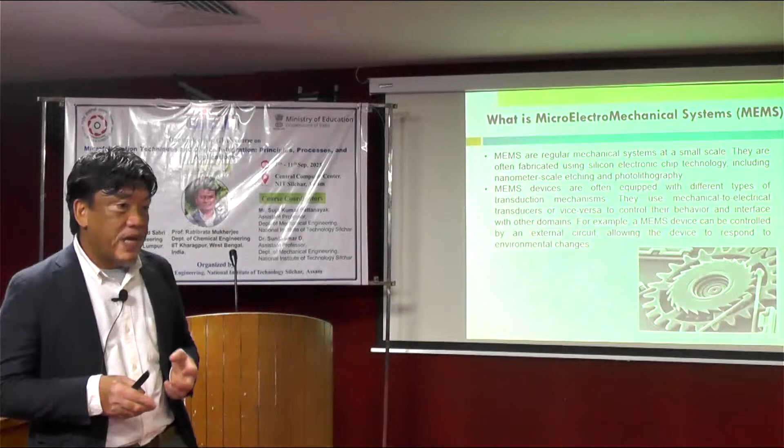MEMS devices are often equipped with different types of transduction mechanisms. It's the same as normal devices - you need to make them move, right? So you need a motor, for example, to make certain machine functions happen. You cannot have a normal motor or actuation mechanism like pneumatic actuation for this kind of device - it's almost impossible. So you need to move them a different way using different kinds of actuators. For example, you have piezoelectric, so you can have piezoelectric be the motor or actuator to move certain parts of the machine. You have electrostatic, so using electrostatic force you can also make things rotate or move. And you can have electromagnetics, etc., in order to actuate or move some nanoscale or microscale components inside the MEMS devices.

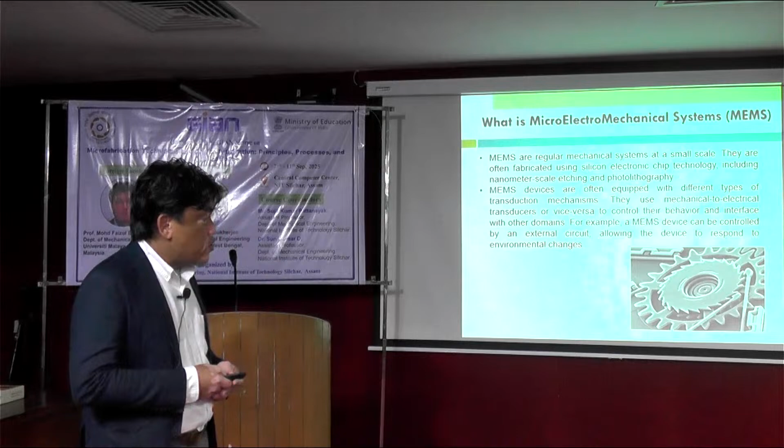As mentioned, a MEMS device can be controlled by an external circuit, allowing the device to respond to environmental changes. So you can have some kind of actuator embedded into the MEMS devices. Later on, when it responds to heat or light, for example, it can make movement. So that kind of sensitivity towards the environment, and anything that can make the machine respond, can then be used as a tool to make whatever intended work needs to be done.

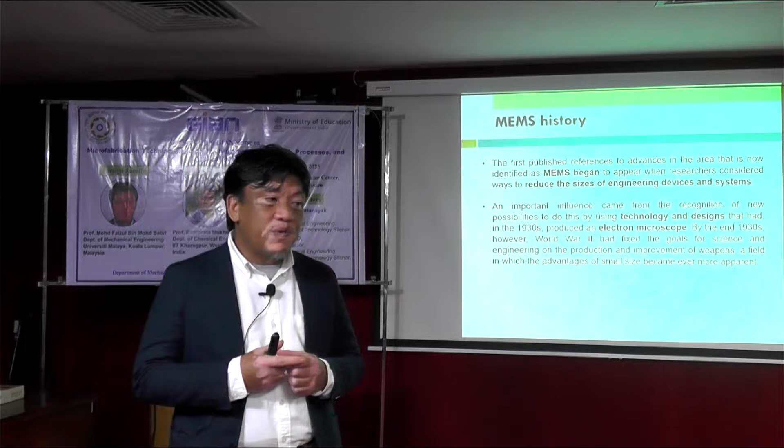Okay, a little bit of history of MEMS. The first published references to advances in the area now identified as MEMS began to appear when researchers considered ways to reduce the size of engineering devices and systems. So it's not from the requirement of having small things - MEMS also evolved with this concept and principle. Originally we wanted a small device so that it becomes more efficient, for example, rather than a big device, done through precision engineering. From precision engineering, it evolved more towards smaller scale and smaller devices to lower energy consumption, for example, or to increase the performance of the device.

So you make it smaller and smaller, and with that you get more towards sustainable engineering - that is part of the philosophy or initial intention of MEMS. An important influence came from the recognition of new possibilities using technology and design that, in the 1930s - quite a long time ago - produced the electron microscope.

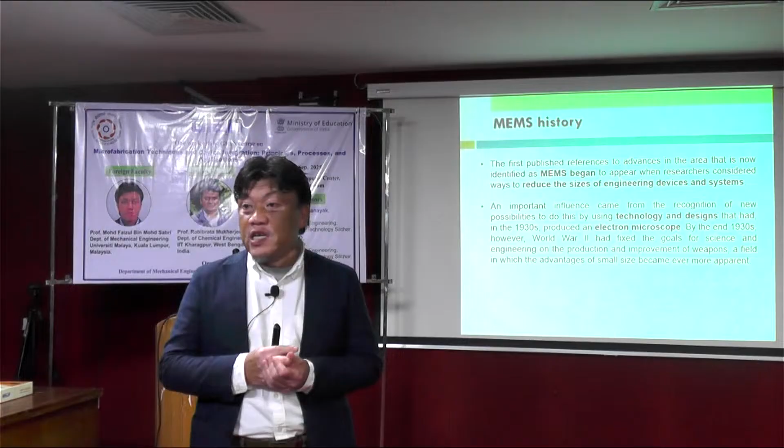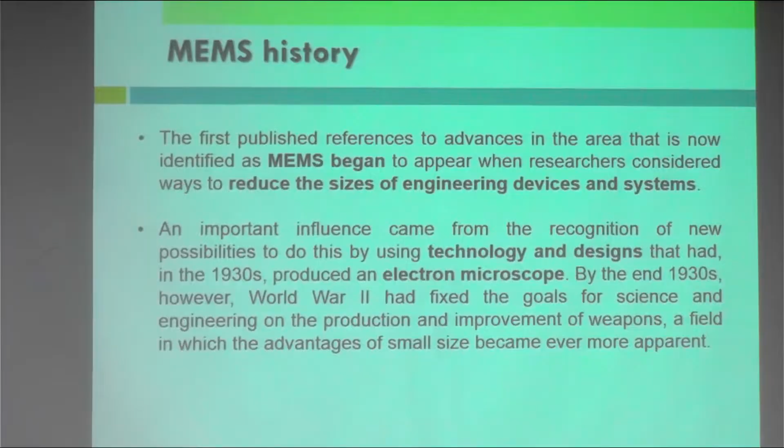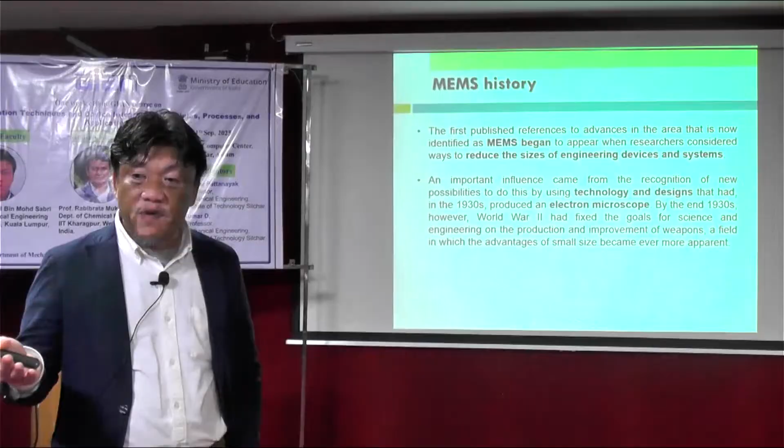The first electron microscope was introduced, but to make an electron microscope, you need technology because scanning electron microscope, or SEM, is very precise and uses a lot of high precision things. With that, you need to develop something small in order to make things precise. So starting from there, it evolved toward precision for military and aerospace applications.

That is where MEMS began to explode in terms of application. A compelling urgency for miniaturization arose from the needs of robotic systems in the new growth area of rocket systems, for example. When the war finally ended, progress made in robotic control systems became a stimulant for space research, an area brought into sharp focus at the newly founded JPL.

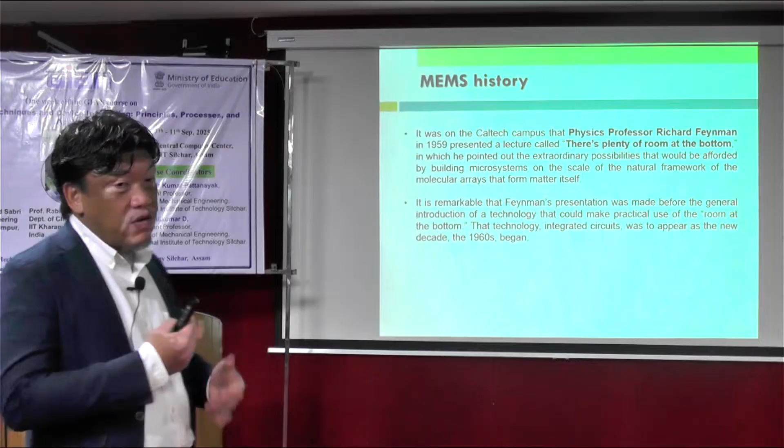I think most of us know JPL at Caltech. He was a Caltech physics professor, Richard Feynman. He wrote an essay titled 'There's Plenty of Room at the Bottom.' This was his philosophical take on looking into materials and products to be developed at the small scale, in which he pointed out the extraordinary possibilities that would be afforded by building microsystems on the scale of the natural framework of molecular arrays that form matter itself.

It is remarkable that Feynman's presentation was made before the general introduction of a technology that could make practical use of room at the bottom. So all these things are about, as I mentioned before, semiconductors. It's about IC, integrated circuits, which were to appear in the new decade of the 1960s.

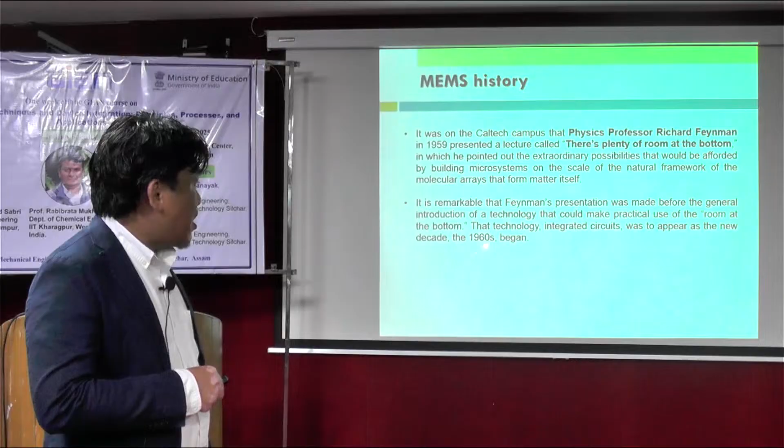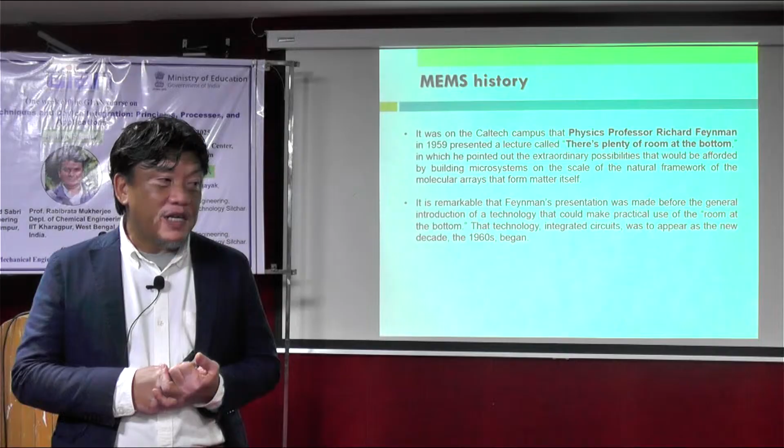I think everyone knows when we talk about chips, now you talk about 2 nanometer, right? 2 nanometer, Intel introduced—3 nano has been introduced, but now TSMC, Taiwan Semiconductor Manufacturing Company, is developing mass production for 2 nano circuit lines. That is where we are heading with MEMS and microfabrication.

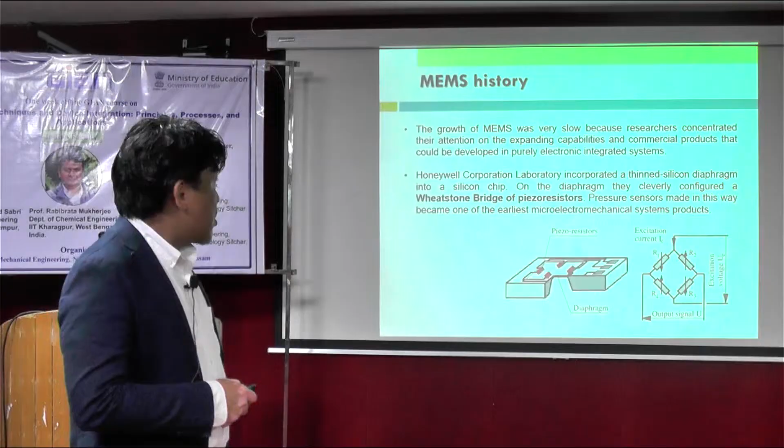The growth of MEMS was very slow because researchers concentrated their attention on the expanding capabilities and commercial products that could be developed in purely electronic integrated systems. So the focus was on IC design using semiconductor processes rather than developing the device itself.

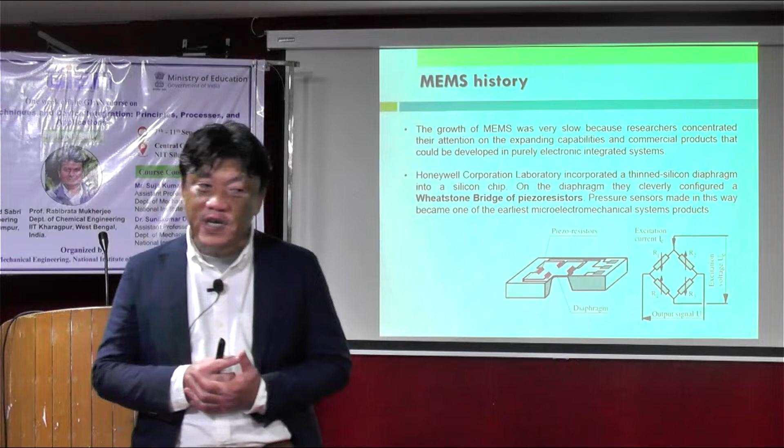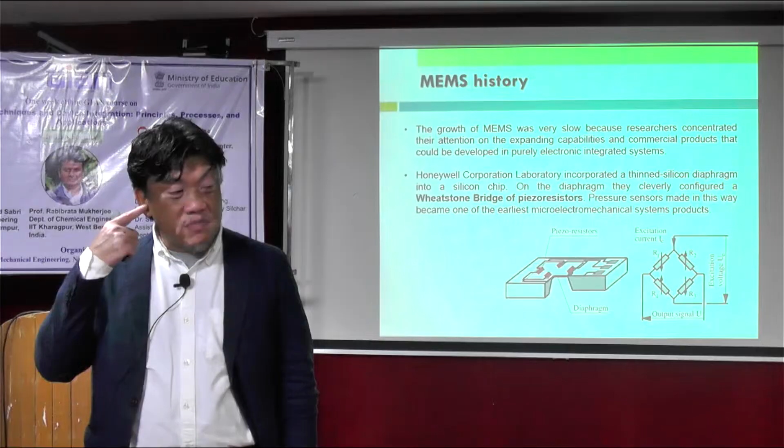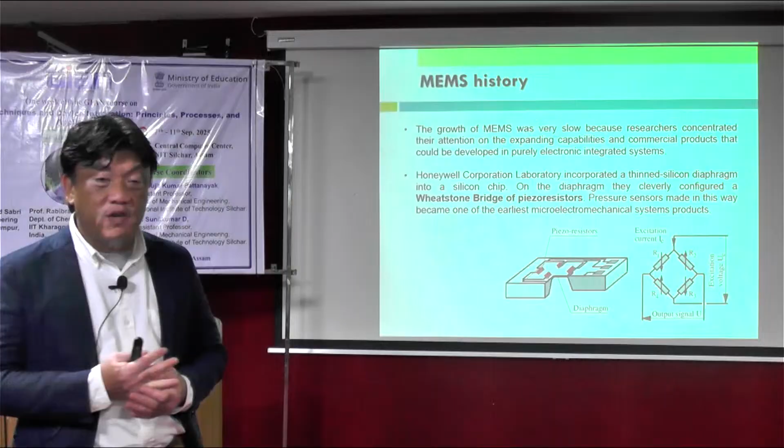Now, you have a MEMS microphone in your handphone. Even your earbuds have a MEMS microphone, and also speakers, MEMS speakers. That kind of device came a little later because people concentrated too much on the integrated circuit itself rather than the device. But you can see a lot of devices in biomedical applications, in electronics applications such as speakers, etc.

Honeywell Corporation Laboratory incorporated a thinned-silicon diaphragm into a silicon chip. On the diaphragm, they cleverly configured a Wheatstone bridge of piezoresistors. Pressure sensors made in this way became one of the earliest micro electromechanical system products developed.

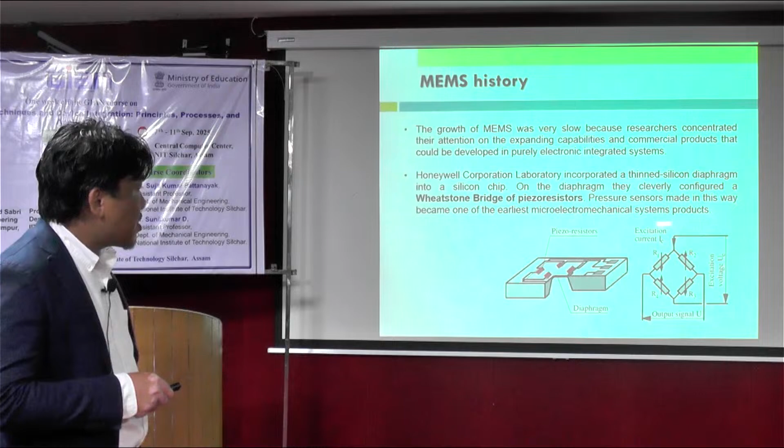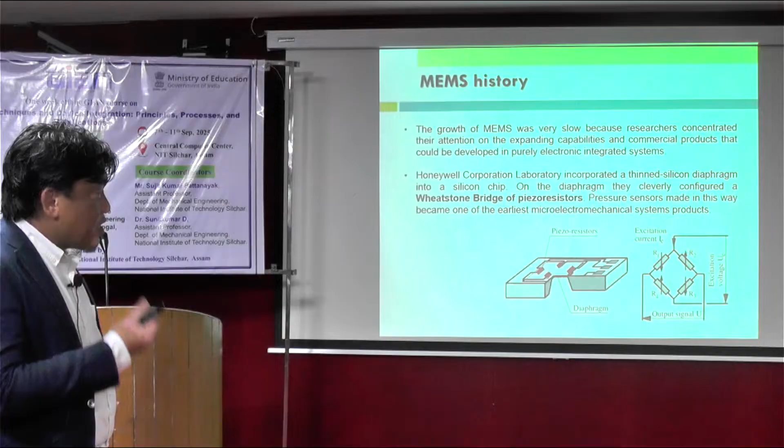So this kind of pressure sensor—when you have a pressure difference, it pushes this kind of diaphragm. With piezoresistive materials, when you provide strain, you can induce electricity. That electricity is a signal of the change in pressure. So that is a very simple but quite accurate pressure sensor.

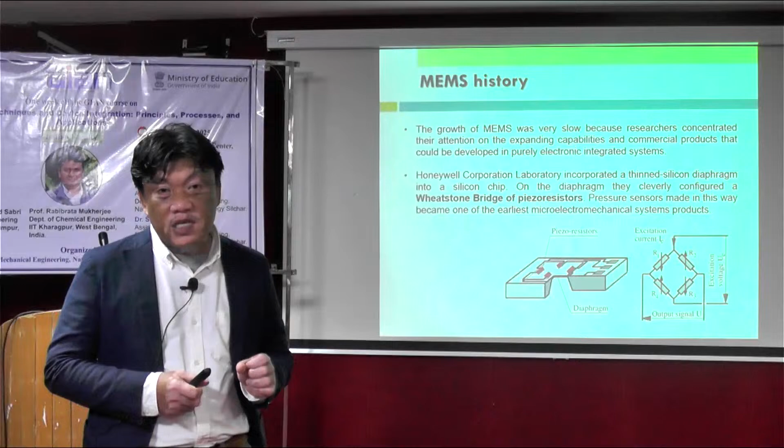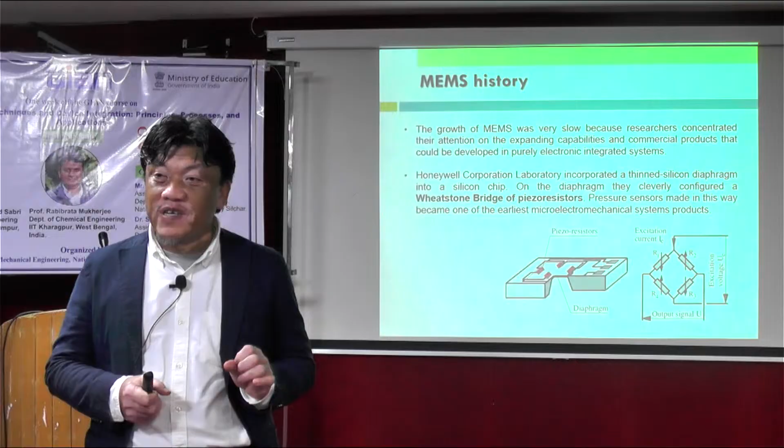This small pressure sensor, later on, can be used in quite a few places. For example, if you have an expensive car like a Mercedes, you have a pressure sensor in the tire itself. If it's deflated or anything happens to the tire, the car can react accordingly because you can always measure the pressure of the tire inside too.

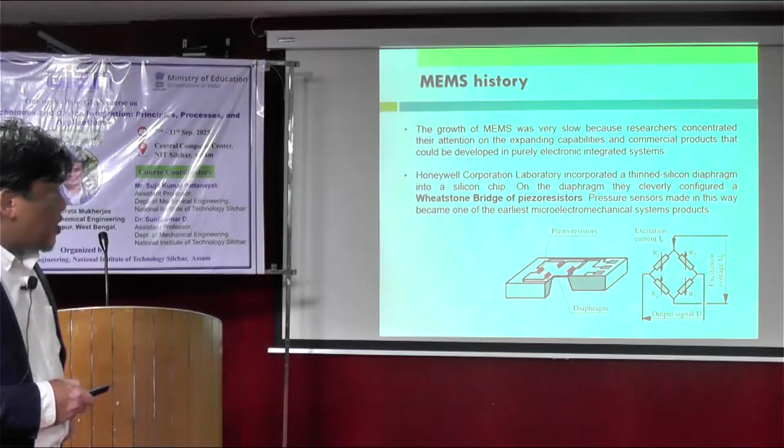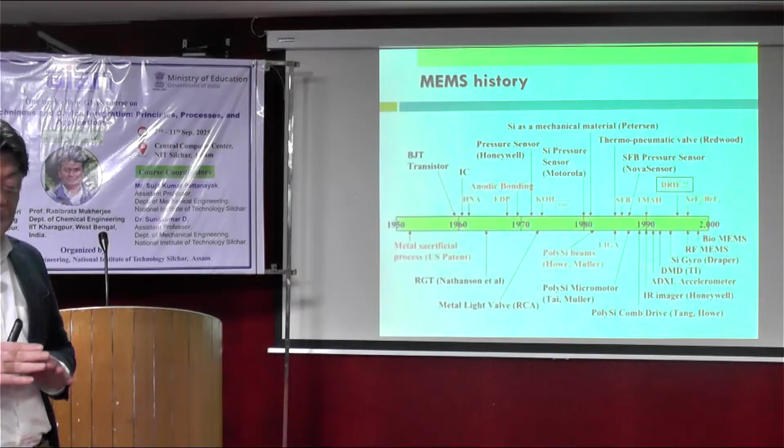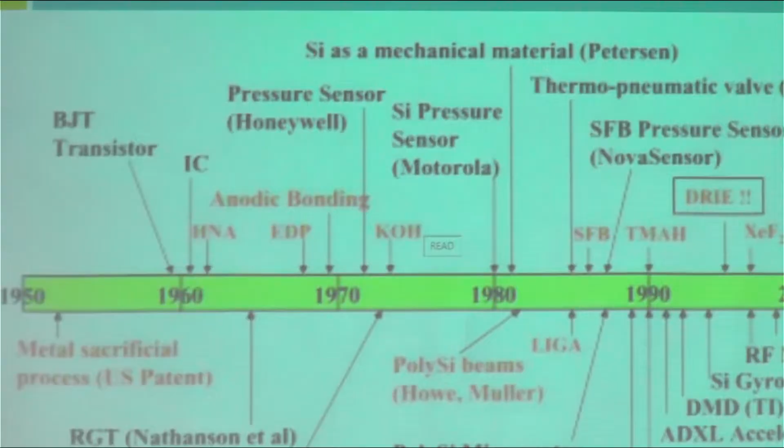A little bit of a summary of the overall MEMS devices. In the 1950s, the metal sacrificial process was patented in the US. Metal sacrificial means you have a layer of metal, then you sacrifice it to develop a certain pattern, because certain different materials can be removed using different chemicals. You can etch—we call it etching—to remove certain materials, for example using hydrochloric or sulfuric acid with different kinds of materials.

Using this kind of knowledge, you can make a sacrificial layer, for example. You have IC, and then a pressure sensor in the 1970s, for example, and a thermopneumatic valve in the late 80s, and polysilicon beams, and a lot of infrared imagers—IR imager by Honeywell, polysilicon comb drive. Comb drive is—maybe I will introduce you later.

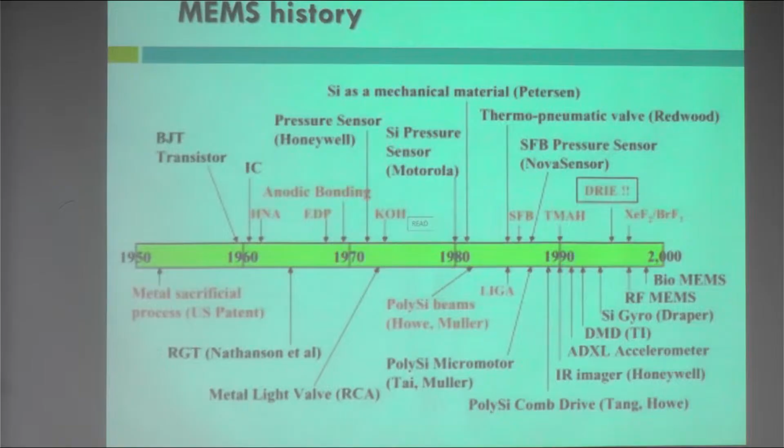It's an electrostatic actuation method using comb shape. This is all related to BioMEMS. BioMEMS is a device related to applications for humans or animals. You can have sensors to monitor your health condition.

This is where DRIE, deep reactive ion etching, is a process to remove material using ion bombardment, developed in the late 1990s. A lot of RF MEMS, where RF is radio frequency, enable our 3G, 4G, 5G networks using high frequency domains. Using MEMS, you can have smaller devices with higher frequency without damaging the materials itself.

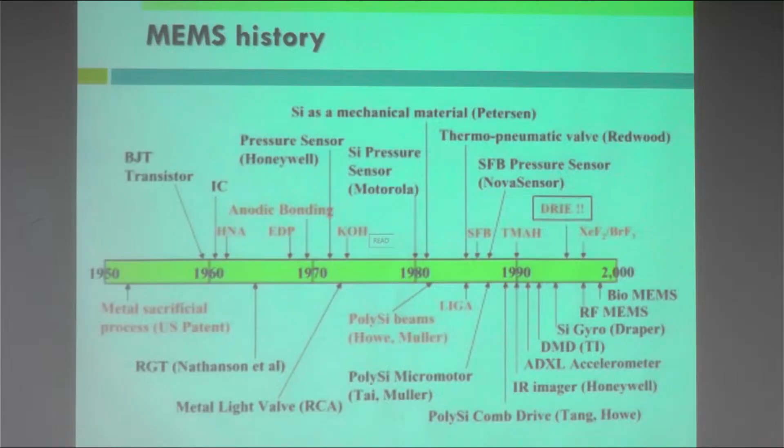If you talk about a 2 nano device, a 2 nano electric circuit, this is at the molecule level. The arrangement of 2 molecules of sugar is the circuit line. Imagine it's just a contaminant normally we cannot see with the naked eye. Even bacteria at 1 micrometer, which is 1,000 nano, is 1,000 times bigger than this size, and we cannot see it with the naked eye.

Just imagine the 2 nano circuit line that you can control and fabricate with the spacing accordingly. To give you another perspective, our human hair is 50 to 70 micrometers. We can see it with the naked eye, but sometimes for myself, due to aging, I cannot see one strand of human hair without glasses. But just imagine this is 1,000 times bigger than the size of the line of your circuit in your handphone. So that is how small it is, to give you a perspective of the scale.

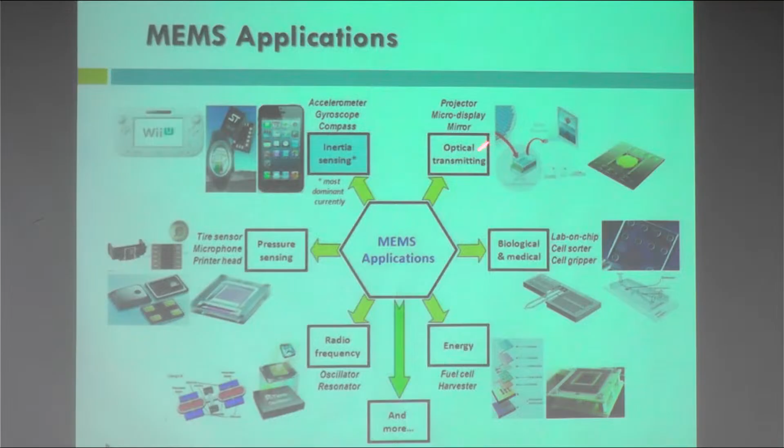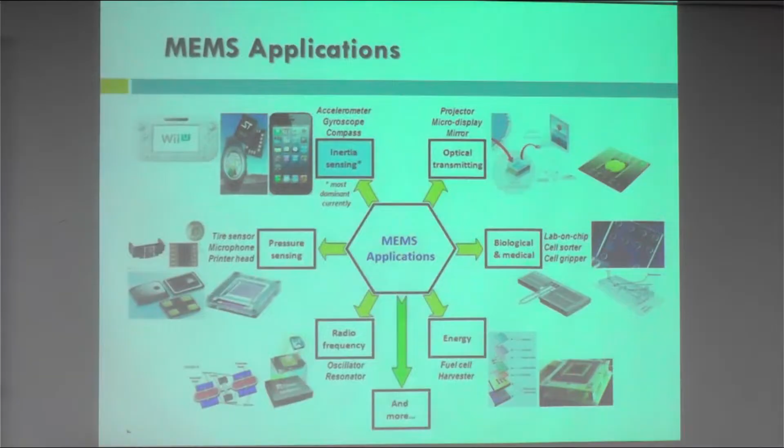We have a projector for micro display. You've seen some devices that can project video or images on the wall using small devices. Then for biological and medical devices, we normally have microfluidic sensors. You make a very small microfluidic disc, and with rotation, you can mix biological substances with a chemical to detect something.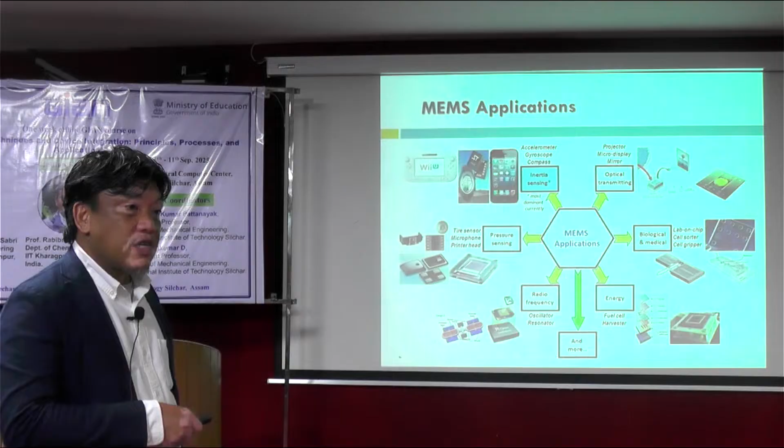You can also measure with this kind of cantilever - measuring one molecule of things, getting feedback from a very precise measurement. You can measure the heat of a molecule, or measure the weight of a molecule using this kind of cantilever, depending on the materials and principle you are using.

Then for fuel cells, you have a membrane, for example, to fabricate the membrane and the electrode for the fuel cell, and RF MEMS as I mentioned - very small devices now with high frequency 5G, 6G coming. Then you have pressure sensors, as I mentioned, in tires, microphones, and printer heads. We will see some examples later on during our case study for MEMS application in detail.

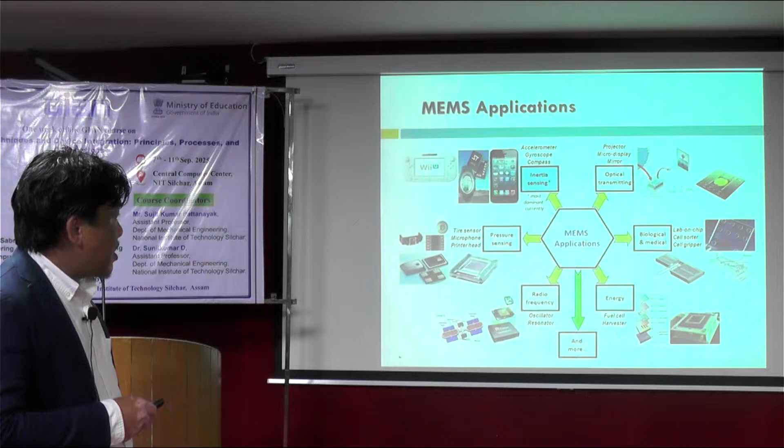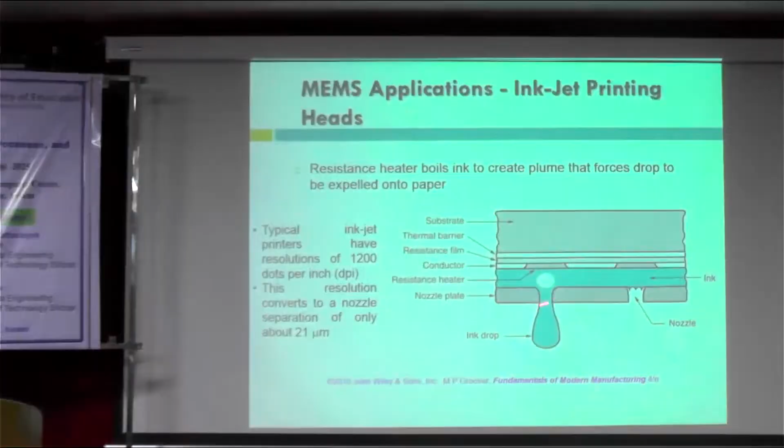So this is just to provide a quick glance of MEMS application. Let's say you have this inkjet printing head. With this inkjet printing head, you have a small nozzle, a few microns, depending. For example, here with resolution of 1200 dpi, this is about 21 micrometer nozzle.

So you use a resistance heater. With this resistance heater, basically when you heat up here, this fluid or liquid will expand due to heat. Then you can have a drop of the ink injected from here.

So of course, you have different types of inkjet heads. You can use piezoelectric, for example, as an actuator.

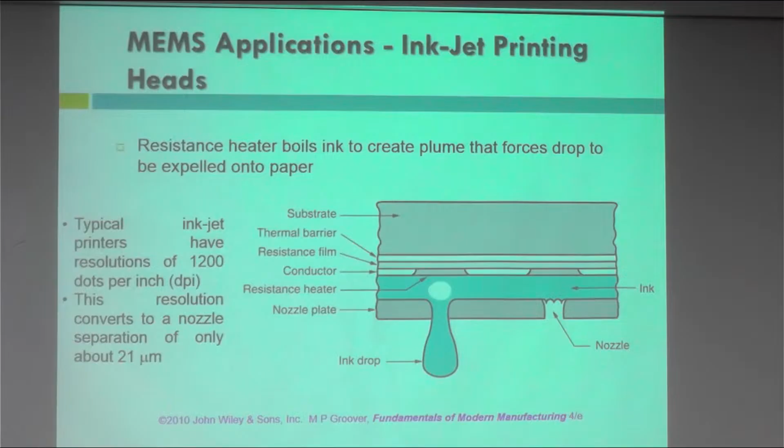So just to give a quick market view for MEMS, in 2024 it's nearly US 20 billion for MEMS, inkjet heads, gyroscope - a few segments, but the total is about 20 billion USD.

And we are dealing in the next 50 years with the SDG, UN Sustainable Development Goal. We are predicted to have to address these issues of energy because of increase in population. We have to look into water security, food security, environmental issues, poverty, terrorism and war, disease, education, democracy, population, etc.

But some of these can be addressed by using less materials. If we use MEMS technology with micro scale devices, we can use less material instead of using a big bulk material to have devices at a big scale.

Skip this one. Okay.

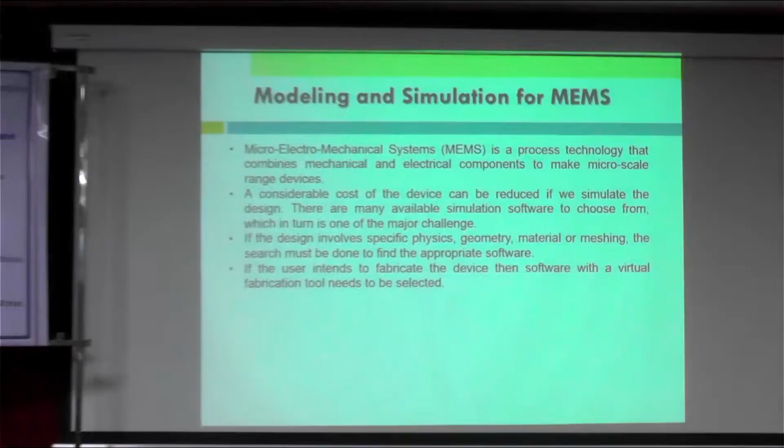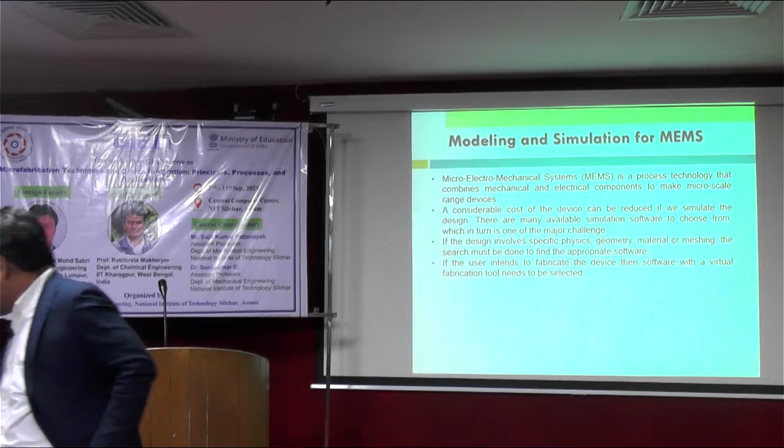Then we look into the modeling and simulation for MEMS. I think some of you become sleepy. It's just me talking. Any questions so far? No? Everything good? Okay, so shall I continue?

Okay, so modeling is quite common in every field of engineering. We try to do simulation and modeling before we start with the experiment or building the actual thing. This will save the cost and save a lot of time if building fails, then we try to predict the performance and predict the properties by simulation. So in MEMS, we can do simulation.

Microelectromechanical system is a process technology that combines mechanical and electrical components to make micro-scale range devices. And a considerable cost of the device can be reduced if we simulate the design. It's the same thing as some other things as well.

There are many available simulation software to choose from, which in turn is one of the major challenges. So if the design involves specific physics, geometry, materials, or meshing, the search must be done to find appropriate software, because some software has limitations.

You can simulate at a micro scale, or you can simulate at macro scale, but the thing is, at the micro and nano scale, things do not follow Newtonian mechanics. So you have to have a little bit different integration of, maybe, quantum mechanics or some other - I'm not well versed in this, but somehow the Newtonian mechanics for macro scale will not provide you the accurate prediction.

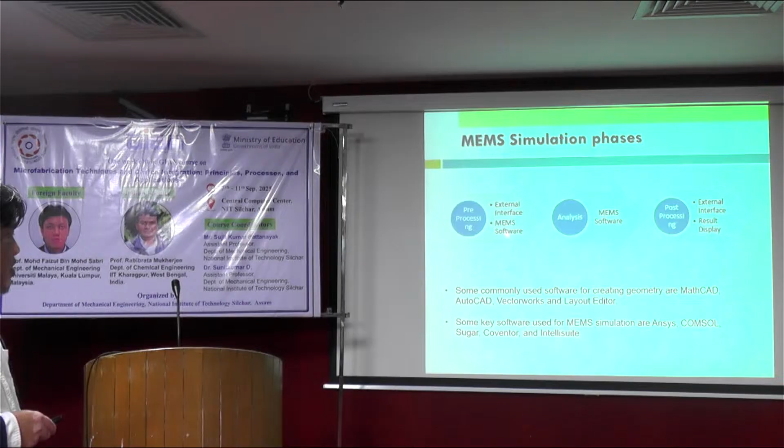So MEMS simulation phase: pre-processing, external interface, then MEMS software. Then you have software to do analysis with the MEMS software. Then you have post-processing, external interface, and result display. So this is quite similar to what we have with common materials, common software processes.

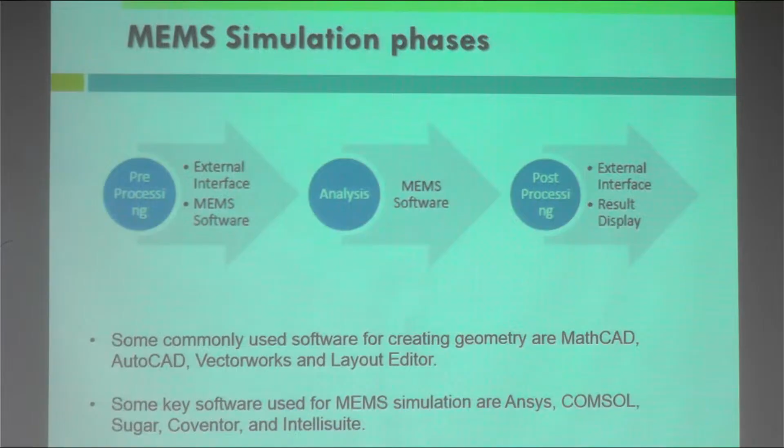Some commonly used software for creating geometry, such as MathCAD, AutoCAD, Vectorworks, and Layout Editor. And some key software used for MEMS simulation are ANSYS. Has anyone used ANSYS so far? No? Okay, you familiar with ANSYS? Okay good. And you can use COMSOL, Sugar, Coventor, IntelliSuite. So these are quite commonly used MEMS simulation software.

So this follows quite a common design process. So you have your layout - you have requirements first. With system requirement and specification, this is just a normal product design process where you identify requirements, identify what a user needs, etc., and what specification should be included in the product. Then you go into system level design and integrate, trying to include everything.

Then you provide the geometrical design of the sensing element, for example. Then you design the signal evaluation part.

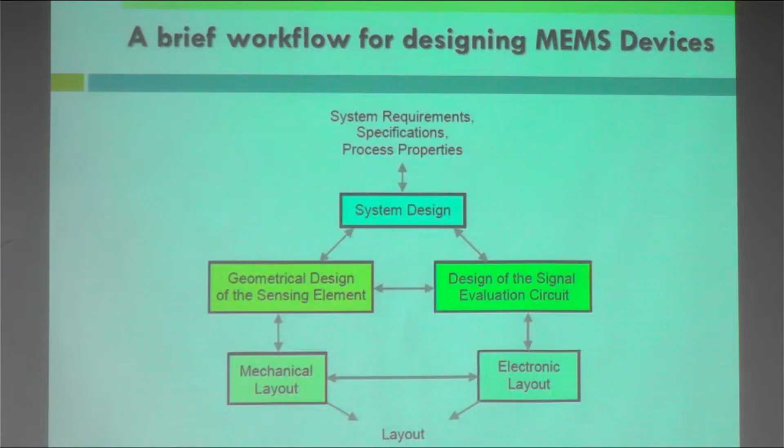So normally MEMS design involves one part about the feedback and signal, and the other about the physical geometry of the product. So you have your mechanical layout and your electronic layout. Some devices integrate everything, but others just provide the electronic layout or circuit layout on the MEMS device, then control everything through integrated electronic parts. Then you have your overall layout. So this is the general process of designing a MEMS device.

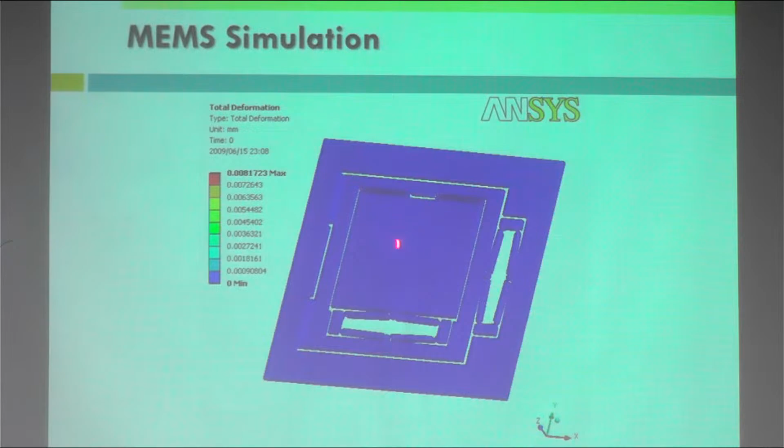For example, this is a micro positioning stage. If you see here, simulation using ANSYS shows the stage, this is the center stage. Since this stage is intended for X and Y direction movement, you design the system so the Y direction is here and the X is here. So everything moves in the X direction. This is the whole stage, and this is the inner stage and outer stage.

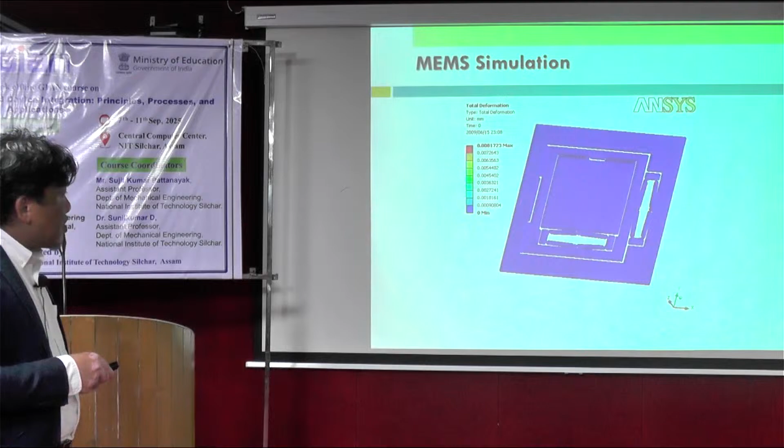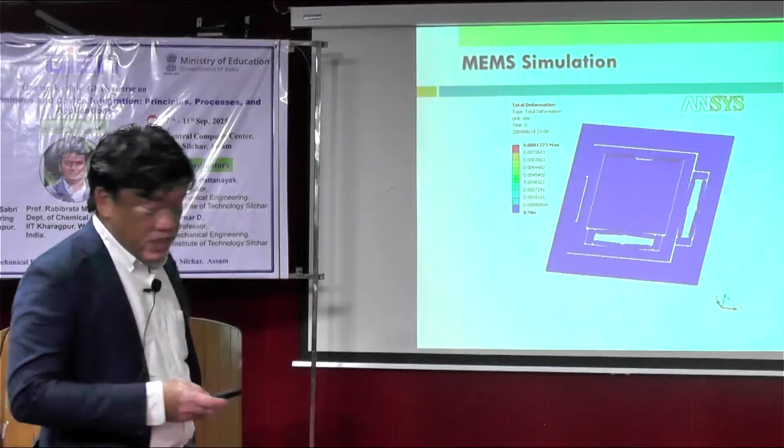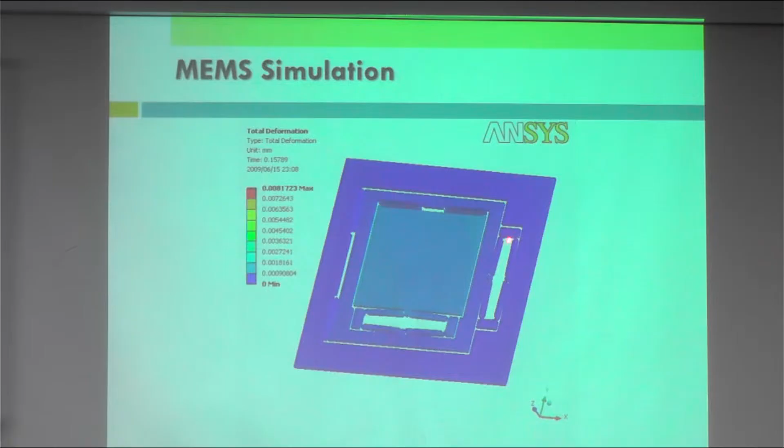So the thing is, you need to provide actuation. There is a kind of animation for this, I'm not sure... Okay, you can see that it can move in both the X and Y directions. So you can simulate this using ANSYS, and this has been done by providing force here, because this place is intended to have an actuator, a piezoelectric actuator.

So it expands here. When the piezoelectric actuator is located here, you get the expansion of the displacement of the piezoelectric material, then it pushes these two sides, and the stage moves to the right, and the same here. So that is the piezoelectric actuator within the MEMS.

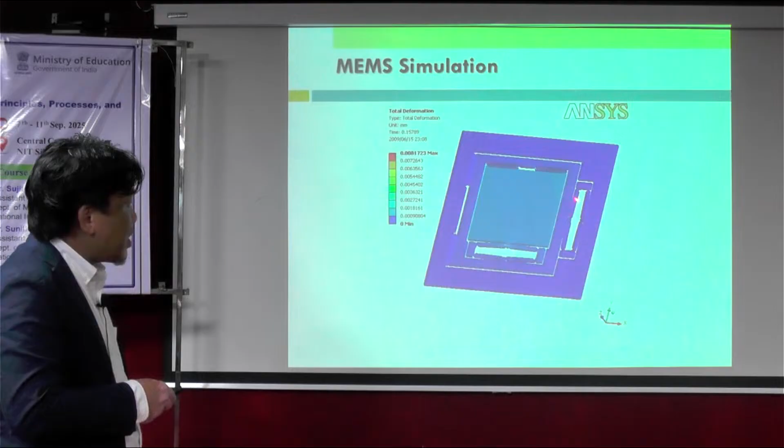Of course, this simulation is intended to measure how far you can move the stage in the X and Y direction, and how much force you need to exert on both sides, meaning it provides you some specification or requirement for you to design the actuator as well.

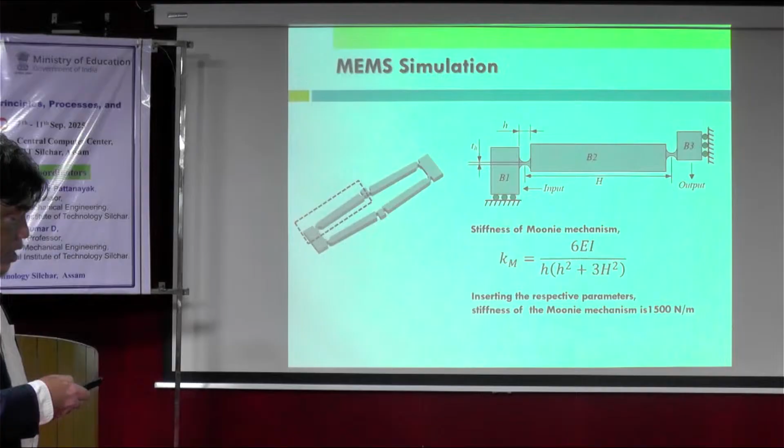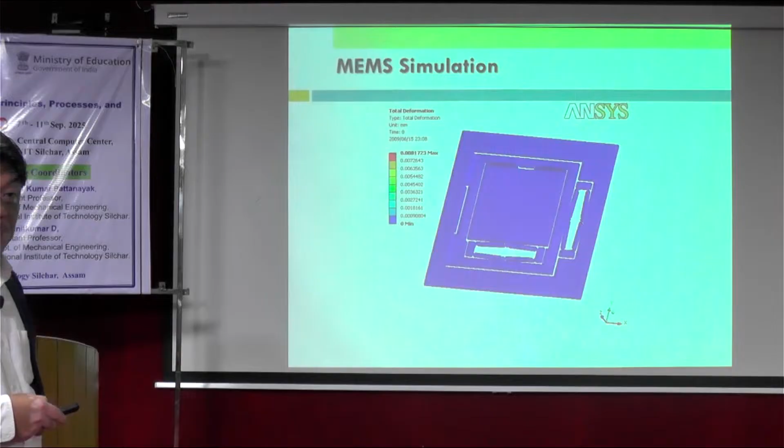Apart from that, if you see here, there is a hinge at every place, because this hinge provides the flexibility to make the movement of this stage, for example. You can also simulate this hinge itself in order to get the right design and the right range, hinge size, for example.

So when force is input here, how much displacement will happen? The displacement here provides the displacement on this side. So the design of the hinge is critical to make sure it will be able to move, and at a certain extent have the robustness to hold the loading of the stage itself.

So this can be done through numerical calculation, and it can also be done by simulation. If you do simulation, for example, you can get the relationship between displacement and force, force in this direction, meaning how much force you can supply to make the movement, since you have to overcome some other spring issues as well.

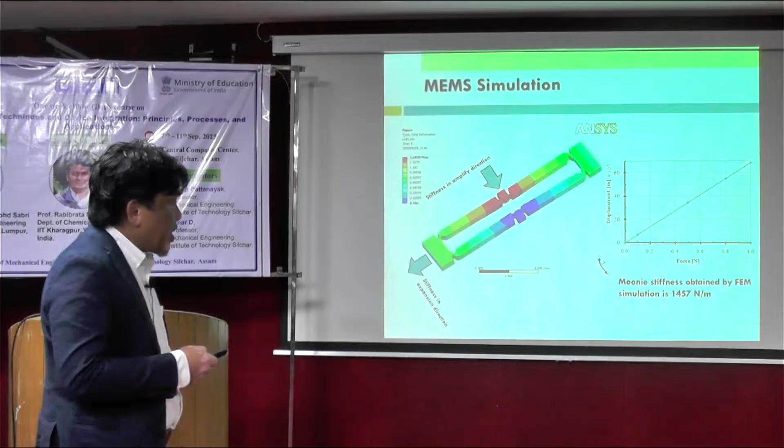So this is a kind of simulation that can be done using ANSYS for MEMS simulation. And this is the actuator that you put in between. You can do the simulation and get the relationship, let's say this is FEM, the simulation using ANSYS. You can see that the angle here is very important.

This Moonie structure basically can amplify the force and also amplify the movement, the displacement. So with a small displacement, you can amplify it a few times, for example, here amplifying up to nearly 20 times. So if your actuator can only make 2 micrometers, with that 2 micrometer movement you can get this delta up to nearly 40 micrometers. So that is a very huge amplification.

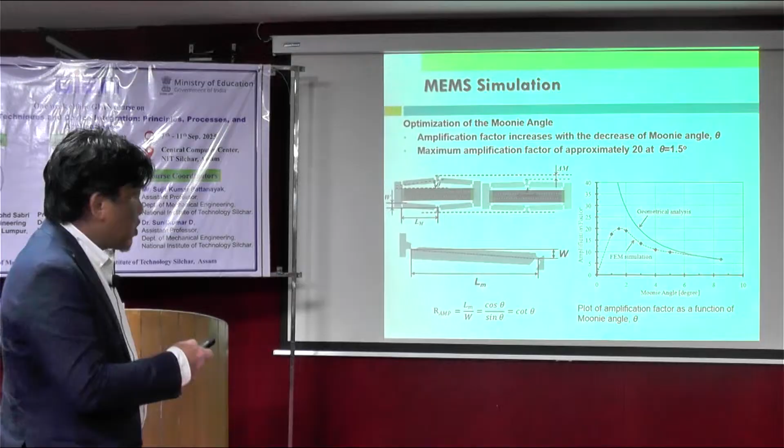Another thing that has been simulated for this design is the stiffness of the spring here. So you have a spring mechanism, and you need to make sure this spring is not so stiff that you cannot make the movement, but at a certain extent you have to maintain the robustness of the spring to withhold the stage, because the stage also has some mass. So you need to make sure this spring can withstand the load, and also be flexible enough to allow the movement.

So let's say this is just trial and error, with a 50 micrometer thickness of the spring, you can simulate, then change the dimension to maybe 60 to see how much force is required to make sure the movement can be done by the system.

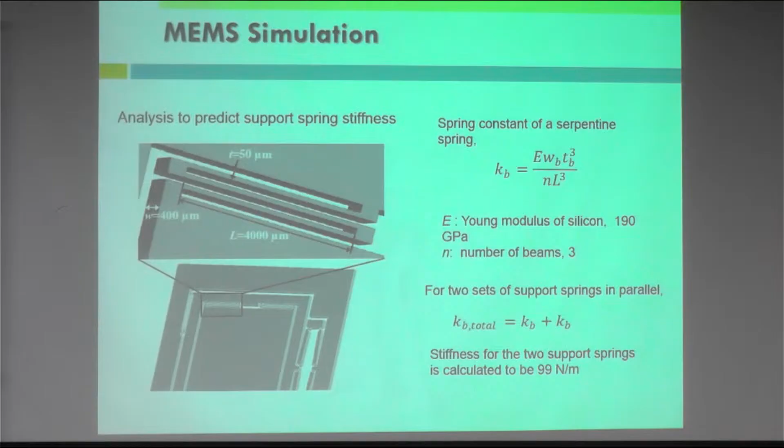For example, here with this spring, you can have a force of up to 1 Newton, then this displacement up to 10 meter times to the power of minus 3. So meaning the support spring stiffness for the two support spring is predicted to be 99.5 Newton per meter.

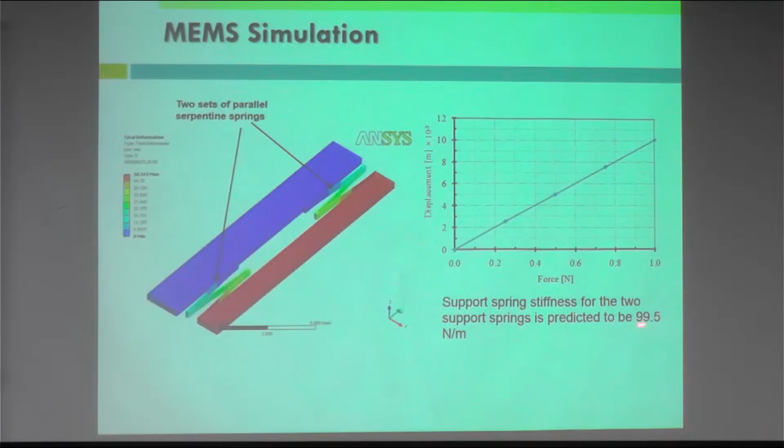So this is another MEMS simulation using ANSYS. Almost the same thing, but I would like to show you the layout of the example of using ANSYS.

I think the file is here. It's not linked. Let me see. Which one? Is it this one? Ah, okay. Oh, sorry.

For those who are not familiar with ANSYS, you can see the interface of ANSYS. Basically you can design here, then simulate and include the properties of the materials, etc. Then you do the processing.

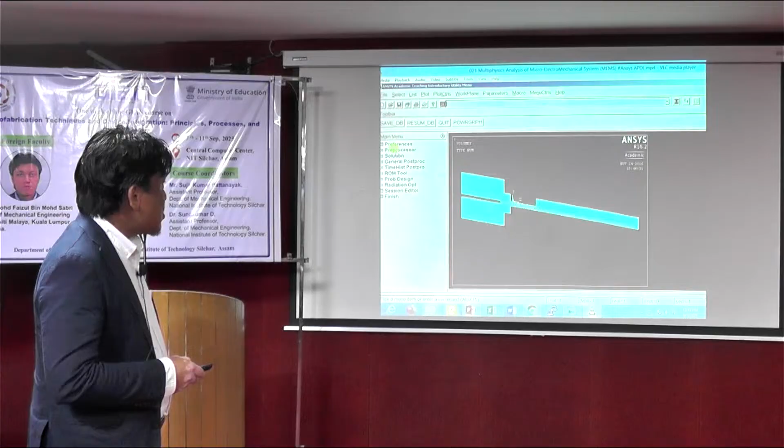This is kind of a cantilever, then with a pre-processing. It's not that difficult for those who are quite familiar with the software.

Basically, tutorials for designing MEMS are available for each software. Even if you use IntelliSuite, ANSYS, or COMSOL, there are many tutorials you can learn from the company itself, from the website of the company. You can learn how to use it with a certain design. But of course, if you have a different design, you just follow the steps, and you can have your own design.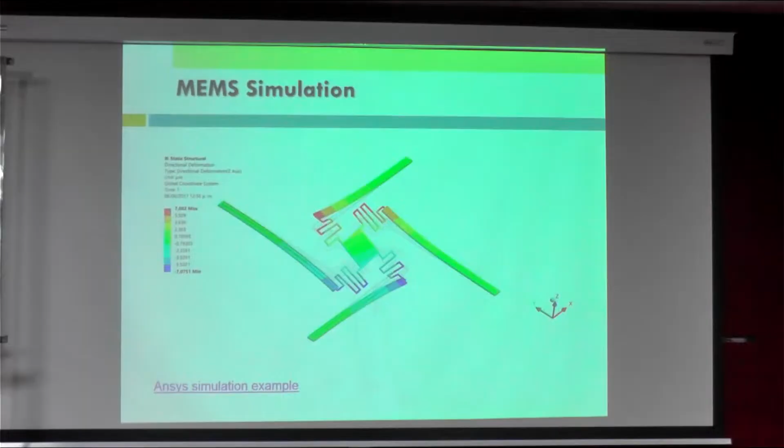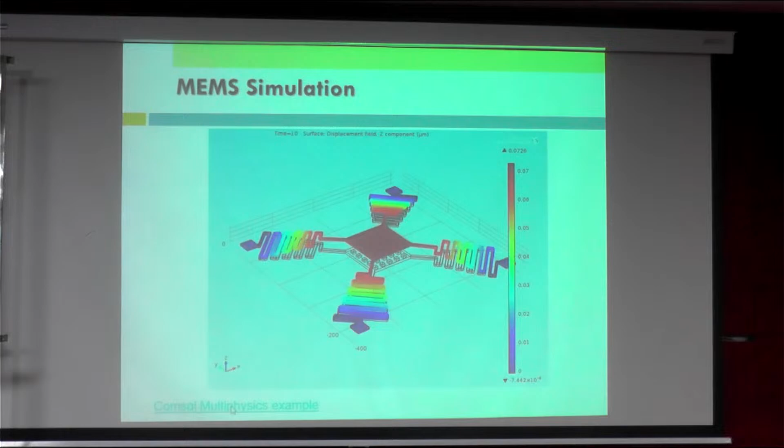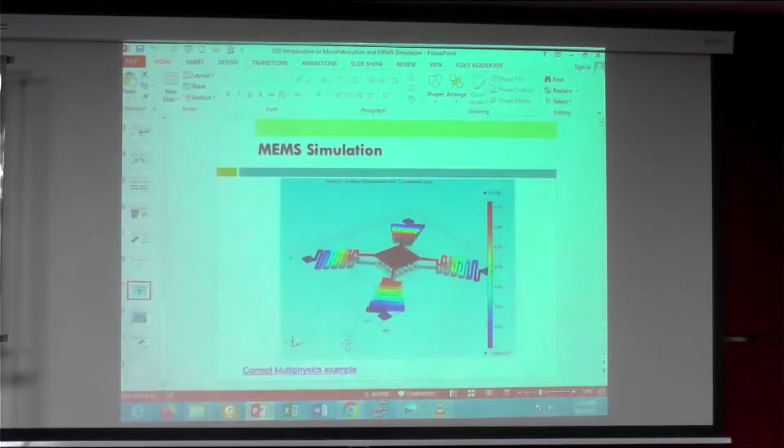Okay, and next is on COMSOL. You have an example of COMSOL as well. You click, yeah. Can you open? Yeah, yeah. That's in the folder, you open the folder. COMSOL, where is COMSOL? Coventor, maybe this one is COMSOL. Yeah, I think. Yeah, yeah.

Just keep go a few minutes. Hello everyone, HF Works, which is used for electromagnetic. We have seen this for few years now. Let's have a look at some challenges posed by MEMS applications.

Sometimes we can integrate the model. We can create the model in SolidWorks, and we can export or import the model into ANSYS or COMSOL to do further simulation of multi-physics. So you can do it that way as well using this kind of software.

So you do geometric modeling using SolidWorks. Even in SolidWorks, to a certain extent, you can do MEMS simulation nowadays, using different material options versus the output results, to get the right and optimal behavior of the devices. This includes different material types, anisotropic materials, temperature dependent materials. Just to get you to know a few things.

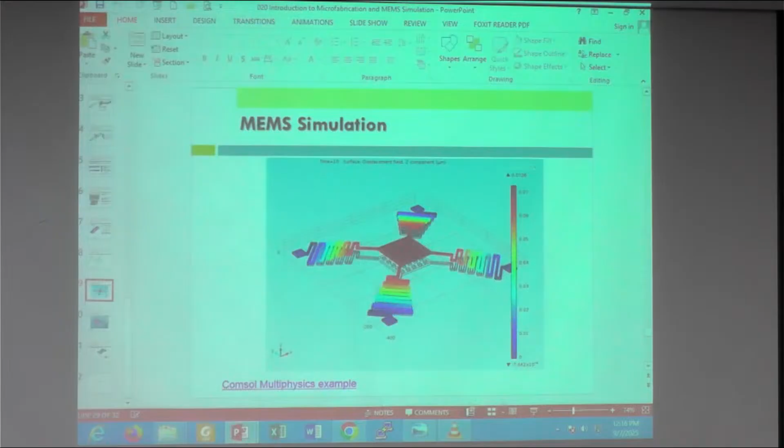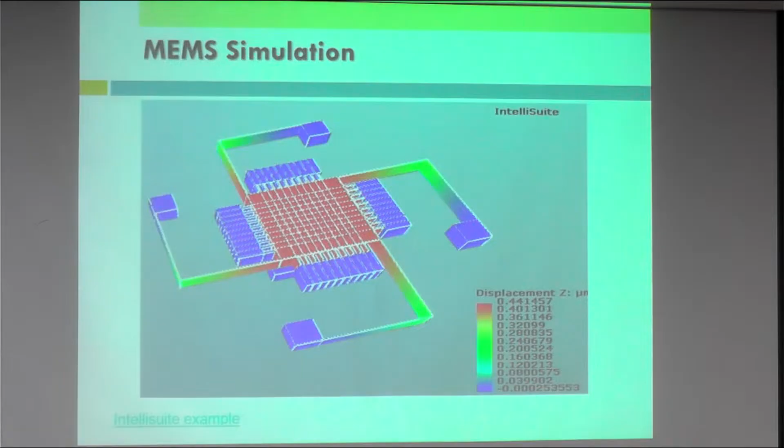Okay, and this is using IntelliSuite. Maybe you can show the interface of IntelliSuite. The link won't work, is it?

So let's start the design of a comb drive structure. Here I've created 2 layers, one is the comb and pads in IntelliSuite. So here I create them by adding new layers, and I can change the color here.

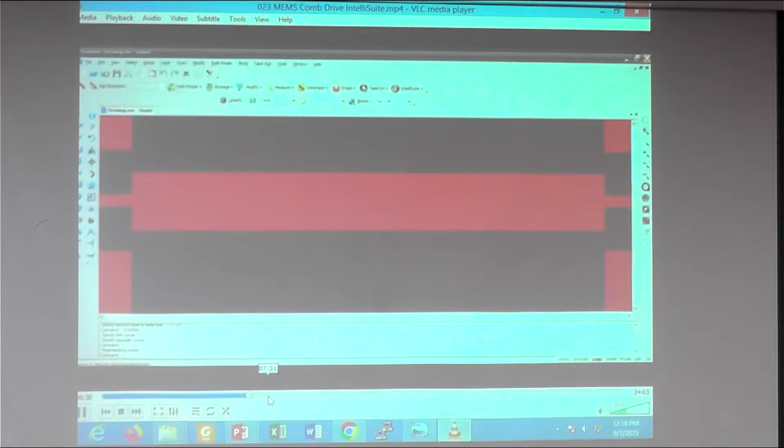Maybe you can skip a few minutes. The idea of changing the color is to show and differentiate between the layers, so it can be used. We can hit escape, so this enables the y-axis. So here I select layer fill, to have a clear look, and go to the modeling, create rectangle, maybe at the center, halfway.

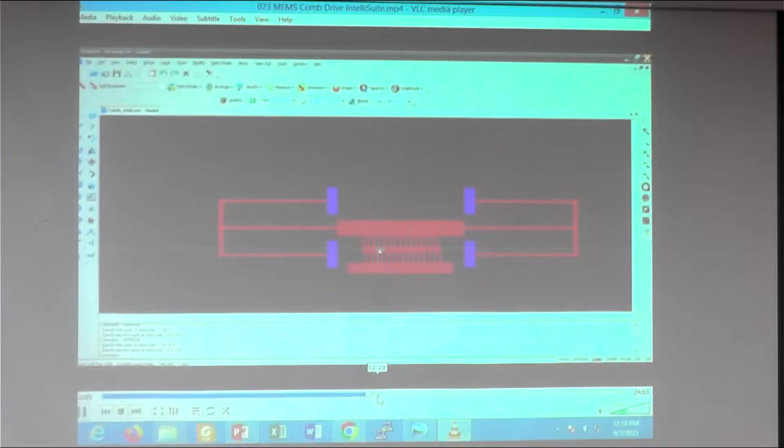Okay, this is a comb drive basically. Comb drive is an electrostatic actuator. So this is.

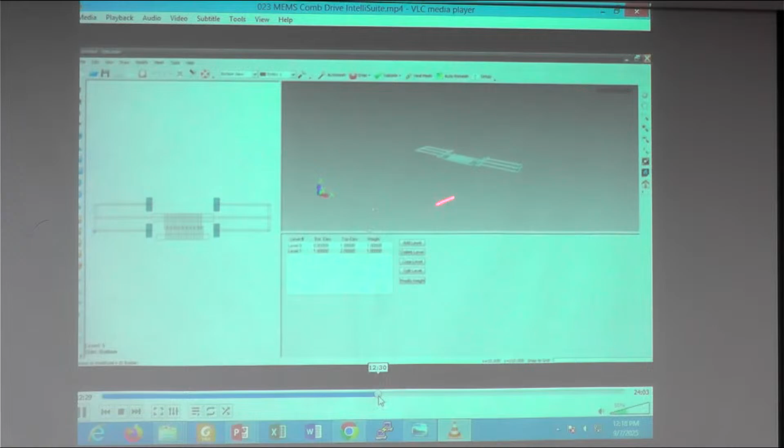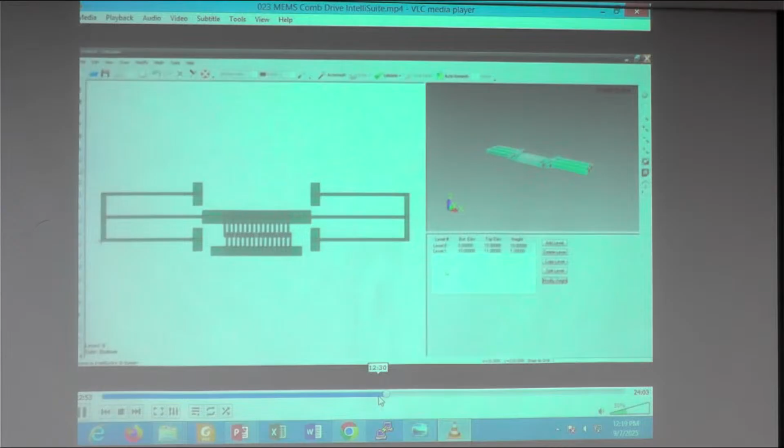Okay, how you design, then you do the simulation for the comb drive. So then you apply electrostatic force. Then we see later on, the movement can be simulated, how much movement you can make due to electrostatic force on this comb drive.

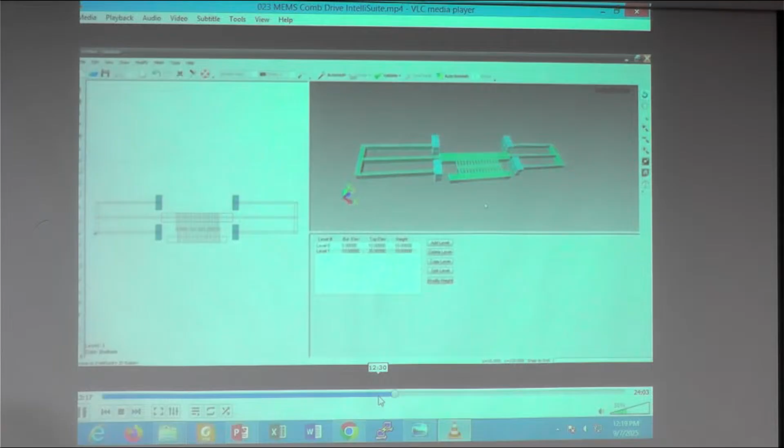Comb drive can be used as an actuator and also as a sensor as well. So it's bifunctional.

Maybe you can forward. Yeah. Okay, let's see some animation.

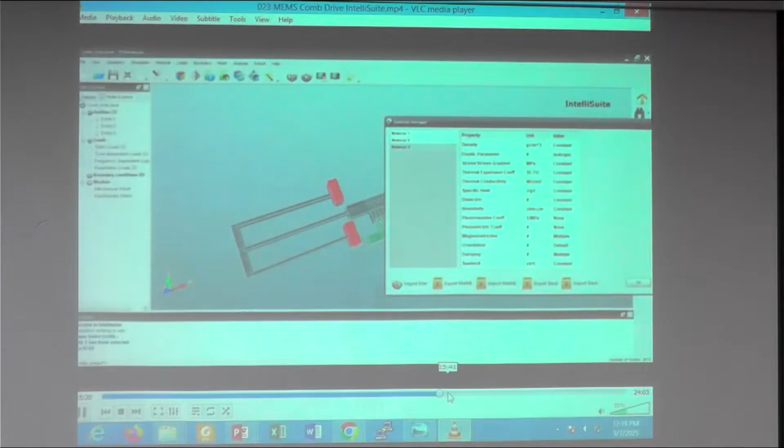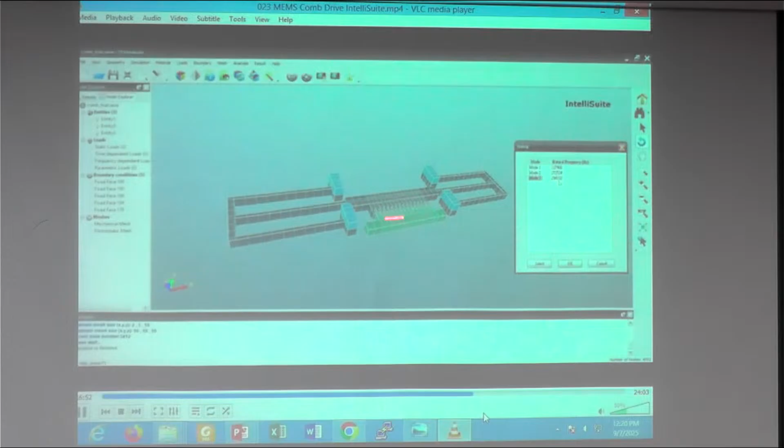So basically, this part is a kind of anchor. And of course, for a comb drive, you have to have a circuit line on this. So that is where the MEMS process is complicated. It's not just structural things, but you have to have electrical simulation as well, to provide the capacitance here, capacitive sensor, and the electrostatic force to this area. Then you have to have your circuit line pass through the surface of this material. You can see that we can make a movement of this. Okay, so that is a comb drive simulation basically.

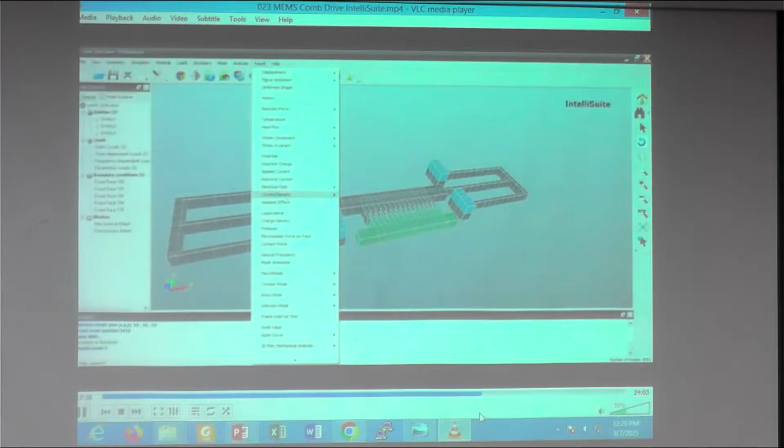I mean, the MEMS simulation using electrostatic force. Normally MEMS actuation is electrostatic, piezoelectric, or heating with thermal deflection materials, and also magnetic. Then you look into force, displacement, and rotation, for example.

A lot of things can be done using MEMS software. Previously it was quite limited, but now you have a lot of options. You can use COMSOL, you can use ANSYS, even nowadays you can use SolidWorks to a certain extent. So all the multi-physics software can be used to simulate MEMS devices.